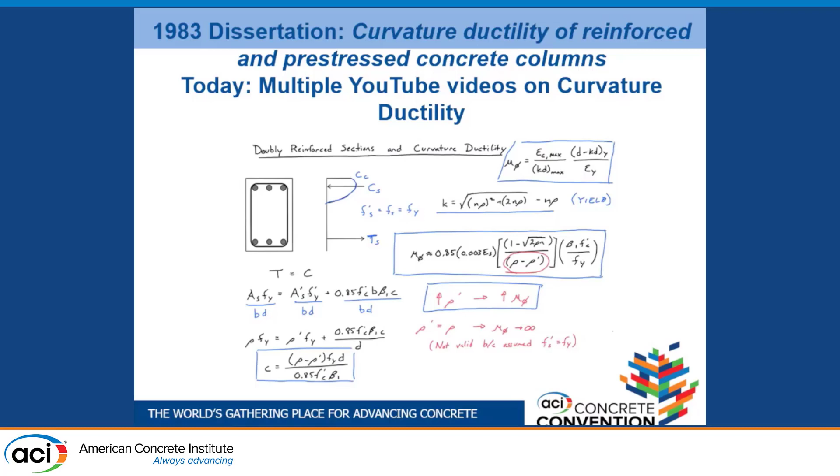So that's pretty cool. I did similar Google searches to what other people did, particularly Scott, where he Googled all those papers, right? So just a few things - I Googled Concrete Construction, where you did the four construction pros. Bruce's name is on there 84 times. I did an abstract hit on ACI, 62 abstracts had his name on it.

I know there's countless ASCC impact, but the one we don't have a number to, and I'd love if Bruce commented on this, is how many negative votes he cast at ACI with very well-constructed comments. I couldn't find it anywhere, but I can only imagine how important those dozens of ACI negative votes are.

That's why we're here, right? We're kind of back to the devil's advocate. Playing devil's advocate sometimes is one of the best roles you can play in a room.

So the CIM research impact he had - I taught in a program focused on the concrete industry, so I was fortunate to already have the love and passion for concrete. Engineering curriculum all involves concrete, but in a smaller segment, so my goal was to educate and train concrete professionals. It was an easy relationship to talk to industry icons like Bruce. I went back and counted the number of semesters Bruce worked on projects with me - some carried over into multiple semesters, sometimes one semester projects, but about 10 different semesters, working with about 20 different students each semester.

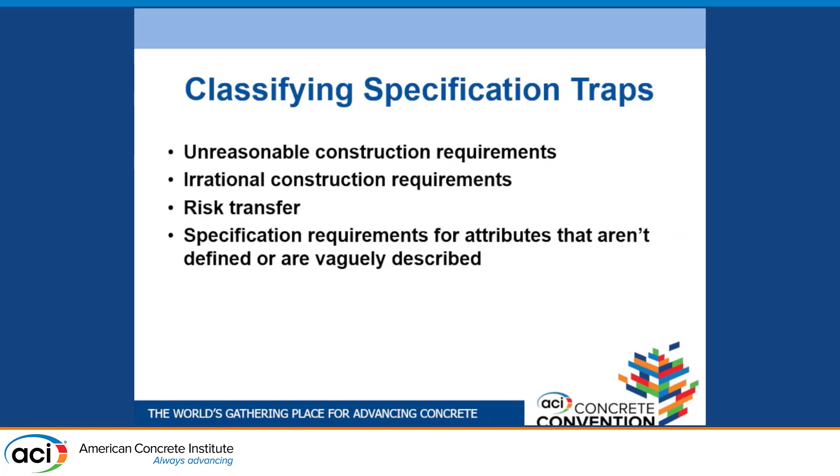Those are things that make people frustrated and want to pull their hair out, and when you don't have a big enough voice to make a change, you've got to go get data to back up what you're saying. So I'm going to do a quick example of one project we worked on. This was one of the first ones brought to the table, and it was a result of a code discrepancy.

The life safety code entered into this specifically with stairs. We did a project to determine if the tolerances listed in the code were actually being achieved in the field, because there wasn't data out there with a methodology for measuring the differences of stair risers to determine tolerance. It was just a tolerance thrown out there without a lot of people measuring it. Bruce, Ward, and I were wondering: are any of the stairs actually meeting it?

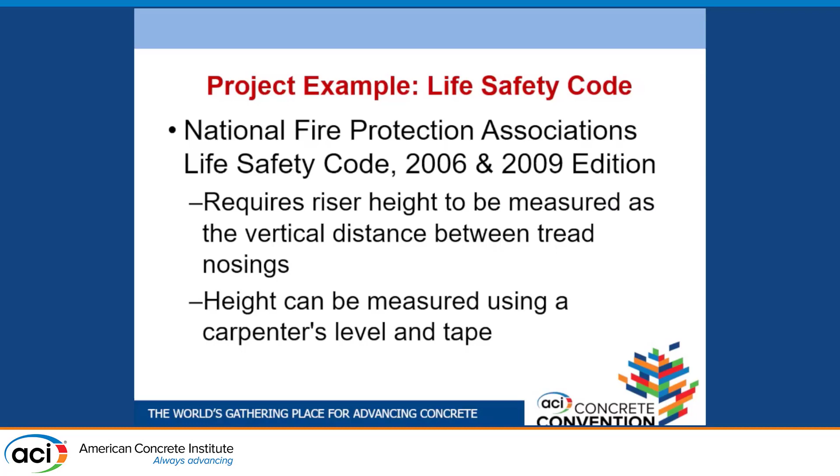This was also a result of a pending lawsuit. Something had happened in a slip and fall where the tolerances of a particular staircase were being brought into question. This created the need to look at existing staircases and see if we're really building to this tolerance today.

The discrepancy was that the life safety code had an extra tolerance listed. The first tolerance is that no adjacent riser shall differ by more than 3/16 of an inch. The additional tolerance was that the largest and smallest riser shall not exceed 3/8 of an inch in any flight. So across all your stairs, none can differ, even if not adjacent, by more than 3/8 inch. But if you look at the IBC and the ACI, they only had the 3/16 tolerance, with no requirement for the maximum and minimum.

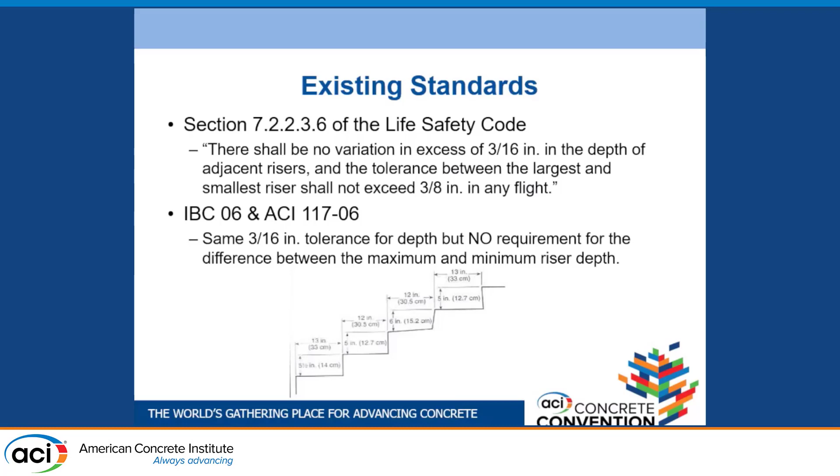So that was brought into question. You can look at an example: if you've got stairs that meet the 3/16, it's very easy to not meet the 3/8 over the course of the staircase. That's what began the research.

The real problem is that if you have a trip and fall accident much later in the service life of the staircase, was it ever in tolerance? Did it become out of tolerance just due to durability, wear and tear? Who knows? There wasn't a data set to support any position, and ultimately that builder could become part of the lawsuit because of that.

We were also curious about cast-in-place, precast, or concrete pan stairs, and whether one was better than another at reaching that tolerance.

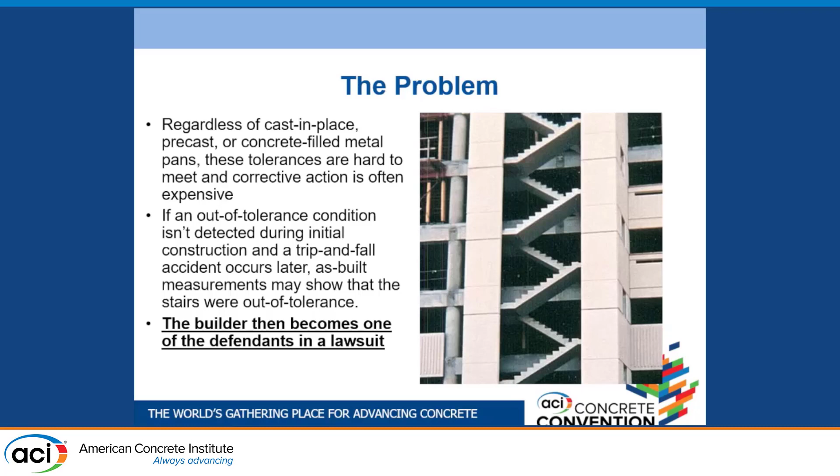So the research need was essentially this: we wanted to see if 3/16 was achievable, if 3/8 was achievable for the overall max and min. We were also curious about any accident history involving something out of tolerance. We wondered, is a quarter inch too much? Is 3/16 really the right number for those risers?

Bruce, with his wonderful way of finding reports, found one from 1992 that tried to address this gap in the data. They did an in-depth review but ultimately failed to establish a consistent, valid link between stair safety and stair geometry. So by the time we did this work, around 2013, we still didn't have a clear answer or direction on stair construction.

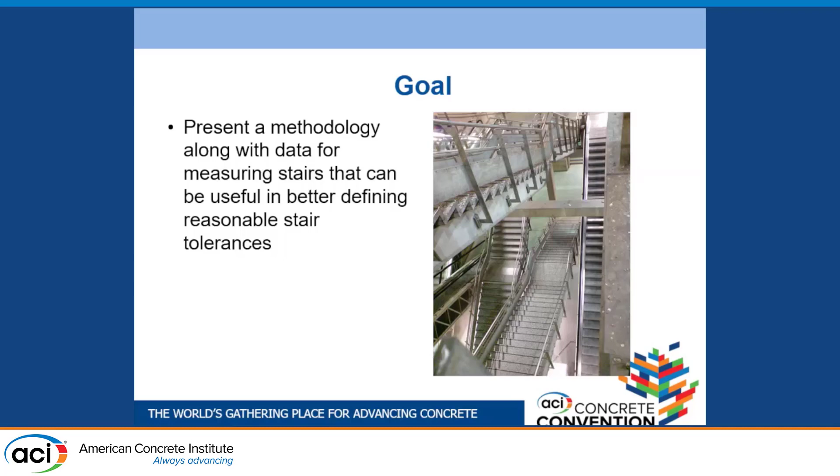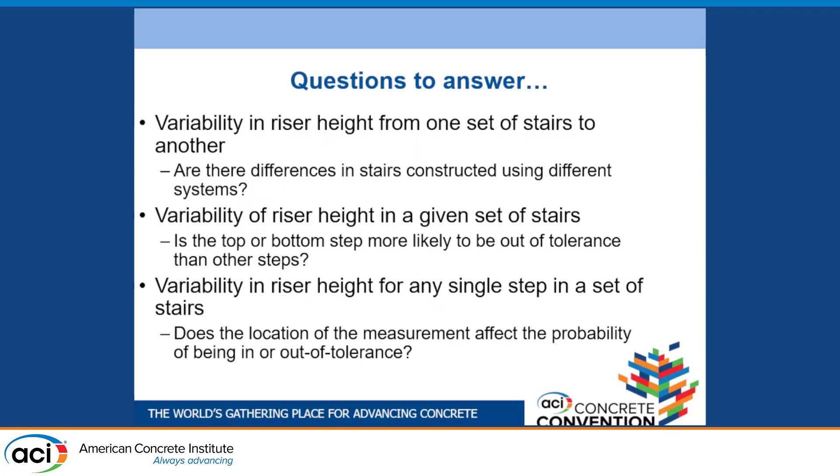Our main goal was to establish a good measuring methodology. If somebody was called into question about their tolerances, how do you measure them? There wasn't a good measurement tool out there, so we tried to establish a consistent one. We also wanted to answer questions like what the 3/8 and 3/16 tolerances were really telling us, and whether the top or bottom step was more likely to be out of tolerance than other steps.

We did a lot of this work at the MTSU campus, which fortunately had a lot of concrete stairs to review. We also went into downtown Nashville and found more stairs, and contractors let us onto their projects, so we tried to make it very variable. These are stairs leading into our football stadium at MTSU — we tried a lot of different types.

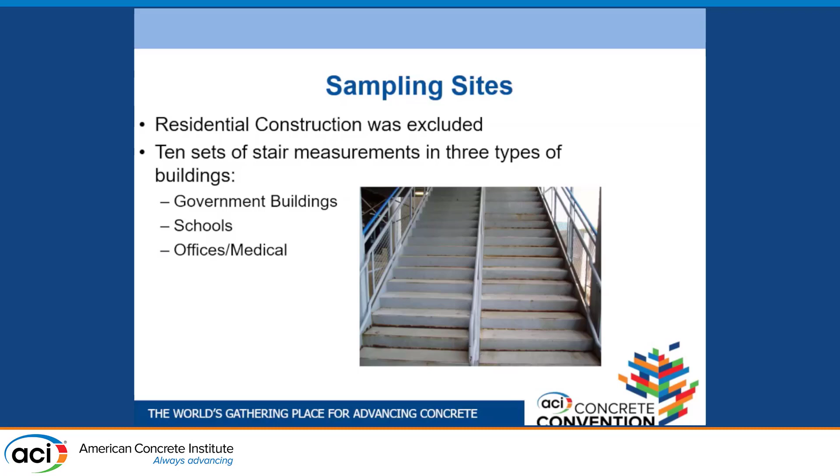We did 10 sets of stair measurements in 3 different types of buildings. We tried to follow an existing measurement protocol, but the life safety code did not have one, so we tried to create something off of current handrail requirements, with the handrail requirement of 18 inches off the handrail being where you basically walk.

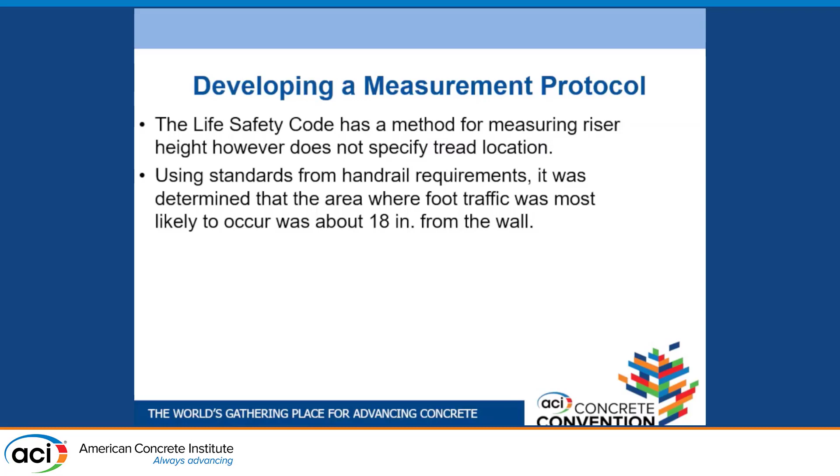So we figured 18 inches off handrail is where the wear pattern is going to be. Let's start there. Here was another staircase at MTSU, to give you an idea of the body of work. The important part of this is just having lots of operators.

So I'll go back to my original motivation. What's great about undergraduates is you get a lot of them. If you really need a big body of data, you can get it with undergraduates. It's harder to do with a single graduate student or even a pair, but when you've got a class of 20, you can have a lot done.

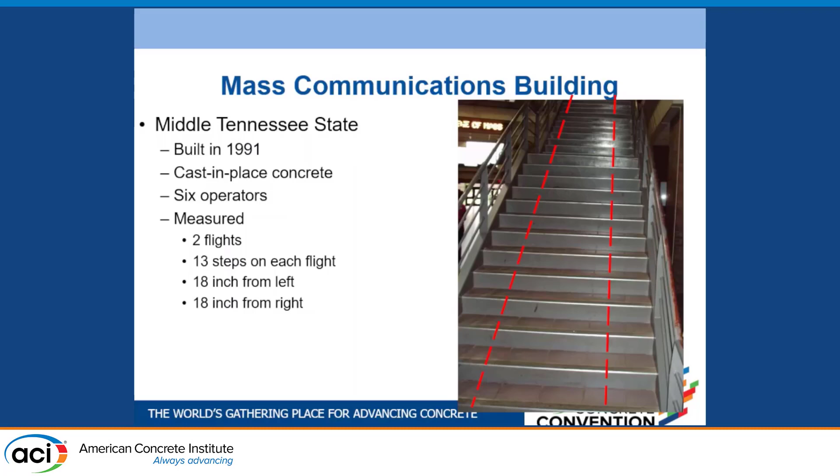So we were able to spread the load here and do a lot of different testing, a lot of repetitive testing, which is pretty normal in getting a quick body of work data. But the idea is just making sure you're finding some way to make the data reproducible and repeatable.

We laid out a precision statement for the work and worked with very basic tools, like a carpenter's level. We did set up a survey instrument to line out the 18 inches off the handrail to make sure that was consistent, but otherwise it was really basic stuff, which is where that loving term of low tech comes into place.

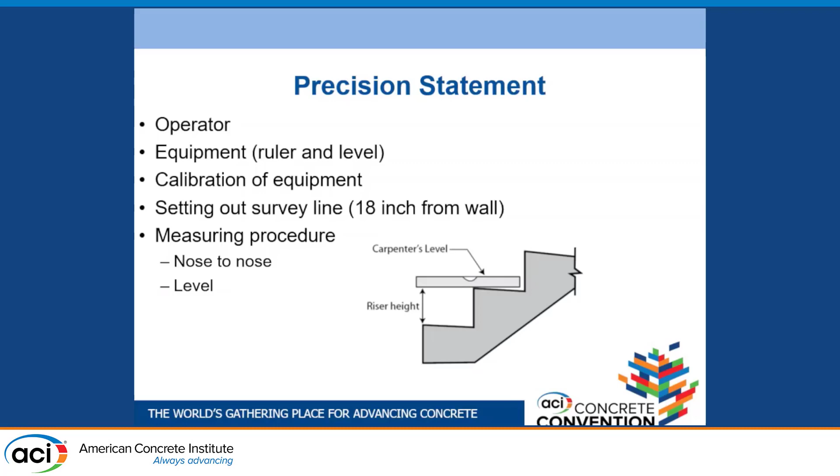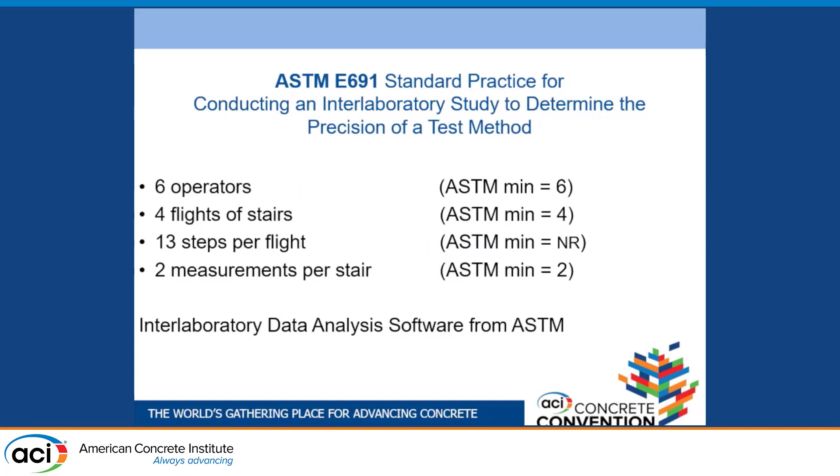We did this lots of times, and a lot of this allowed for really good statistical measuring and results. We were looking at E691 to build our precision statement, so we tried to hit some of the minimums so that we made sure we had enough data to really evaluate for the project and for the study.

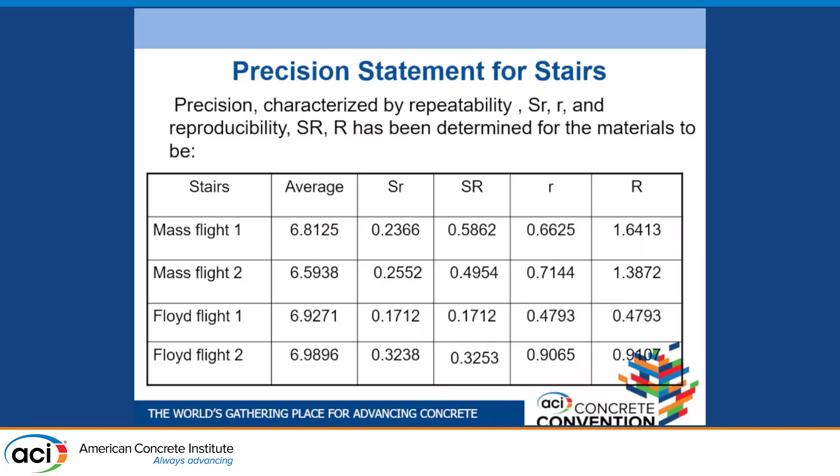And then we started building our precision statement for both repeatability and reproducibility. You can kind of see what ended up coming out of some of these, just 2 of the staircases, but this allowed us to understand what one operator or multiple operators could do in measuring this methodology, or using this methodology that we were trying to build and create.

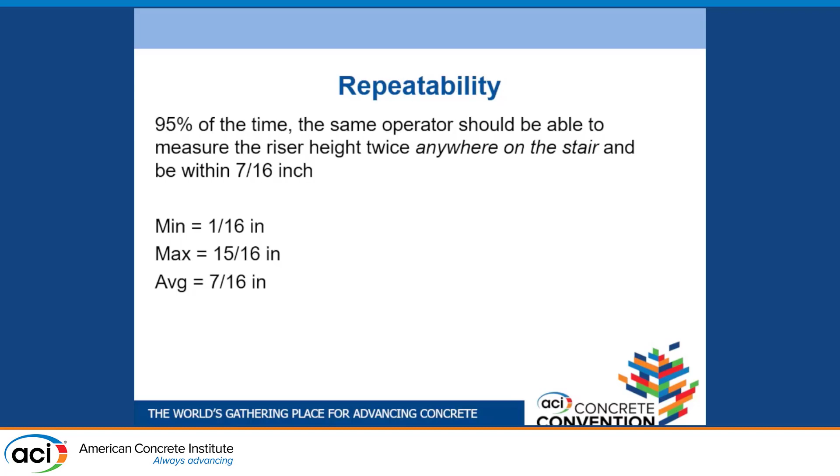What we figured out was that for repeatability, we were able to achieve an average of 7/16 of an inch variability between the same operator, and then an inch of variability between multiple operators. So just trying to establish some baselines: what's possible with the work, and what was our data set going to tell us?

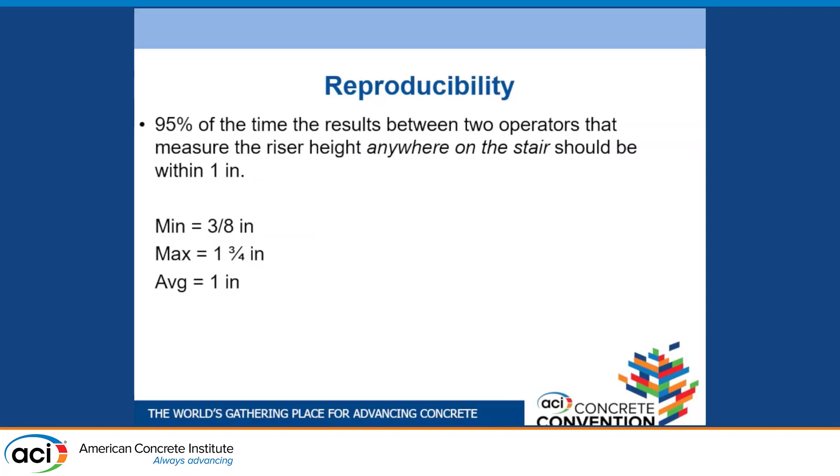The result was that 30% of the staircases we checked were out of tolerance. They did not meet the 3/16 tolerance required by both A117.1, IBC, and life safety code. So 30% of the staircases don't even meet it. Did they meet it when they were constructed? Who knows? But if a slip and fall happened, they'd be held to these numbers.

So establishing a methodology that can be employed early in the project, which is what I recommend, is having a pre-construction meeting to discuss if we need to measure this for tolerance, where are we going to do this, which is partly the methodology that we built, and when. Similar to floor flatness, when do you test it? When is the right time to actually check for stair tolerance?

That told us 82%, that other extra code requirement that life safety had, 82% of the staircases failed that 3/8 from max to min. So again, things weren't even being built to code that had been in place for a long time; it just hadn't been challenged or looked at in the way that we did. This indicates a very high percentage of the stairs measured were not within tolerances in a couple of the different editions of the life safety code.

So a good example of just how you can take some data and move this back into conversation. That data was able to be used in the lawsuit, so it helped, hopefully. I think actually it did ultimately end up helping. So I think it's those sort of milestones that really make some of this work feel very special.